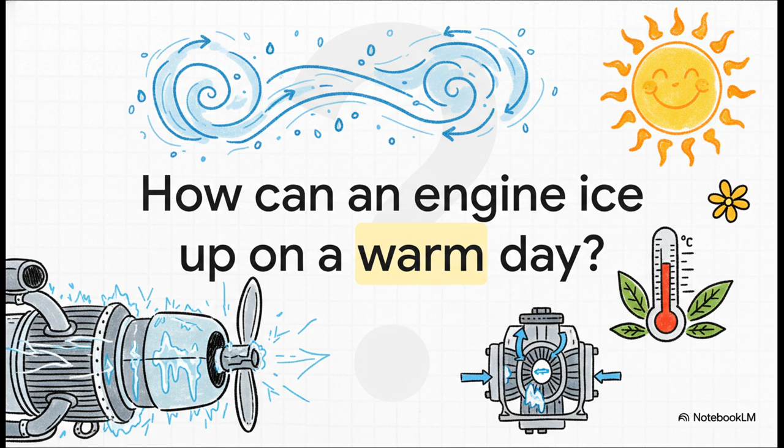But understanding the physics here is absolutely key to keeping yourself safe in the air. And that's exactly what we're going to do. Think of this as turning your textbook into the perfect set of study notes. We're going to break this whole topic down, piece by piece, so you have a clear, actionable guide to absolutely ace that exam. Okay, first things first.

Any great set of notes has to start with the main idea, right? The thesis. And of course, the key vocabulary. I mean, if you don't know the language, you can't follow the story. This right here, this is the central truth of this whole lesson. The big takeaway is that high humidity, not just cold air, is the real danger. That means pretty much any piston engine can be at risk if the conditions are right. You've got to get that concept locked in.

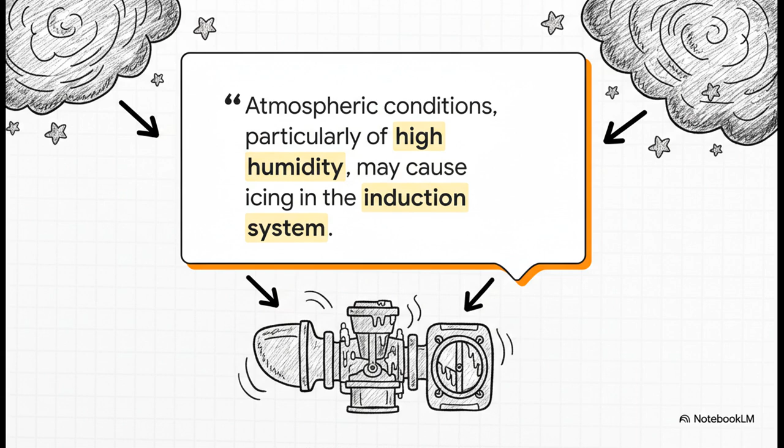So, how does this actually happen? Well, inside your engine's carburetor, there's this narrow throat. It's called a venturi. And as air gets squeezed through it, the pressure plummets. And when pressure drops, guess what? So does the temperature. It's just a basic law of physics playing out right inside your engine.

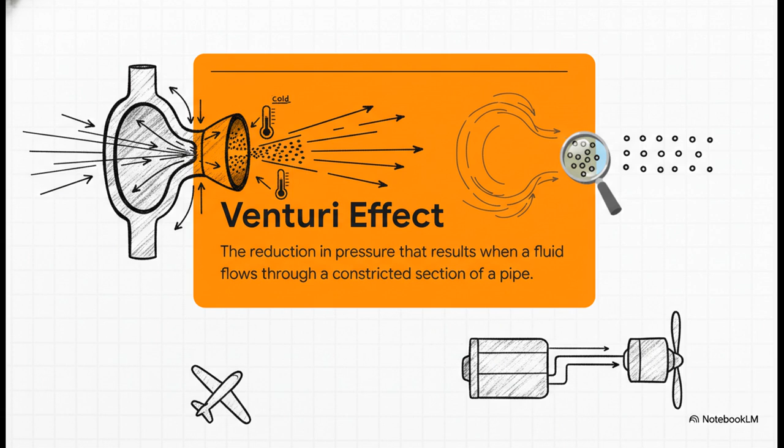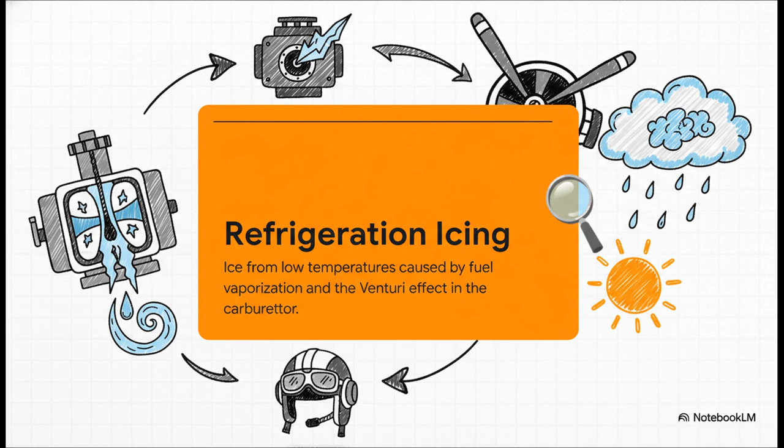And that leads us straight to the main villain of this story: refrigeration icing. This is the stuff that can get you on a warm day. You've got the venturi effect cooling the air, and then the fuel vaporizing chills it down even more. And if there's enough humidity, boom, it freezes solid right inside your carburetor.

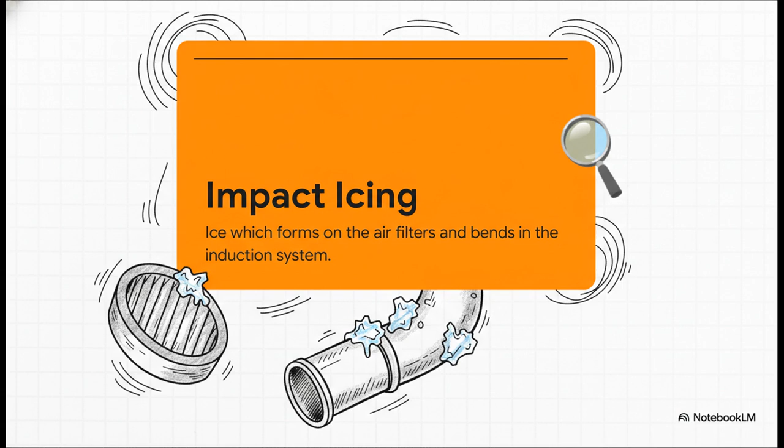Now, the second type is a little more what you'd expect. It's called impact icing. This is just supercooled water droplets smacking into a cold surface, like your air filter or the engine intake, and freezing right on contact. This is the kind of icing most people picture, you know?

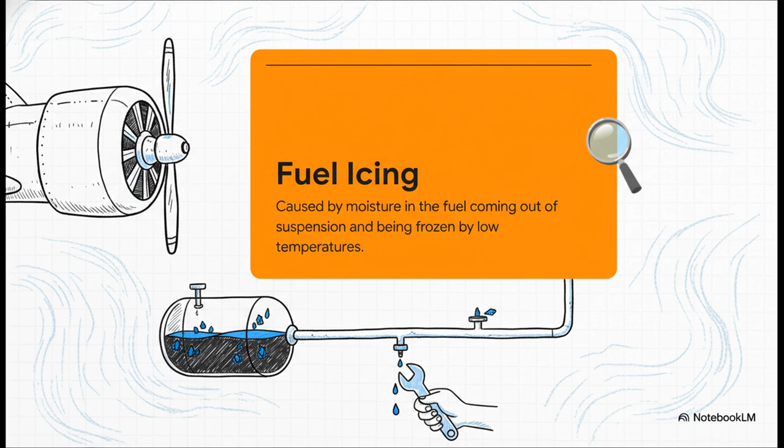And finally, we have fuel icing. Now, this one's less common, and it's all about water contamination inside the fuel. When that fuel gets cold, any water in there can freeze up and start clogging the fuel lines. It's yet another reason why that pre-flight check is so important.

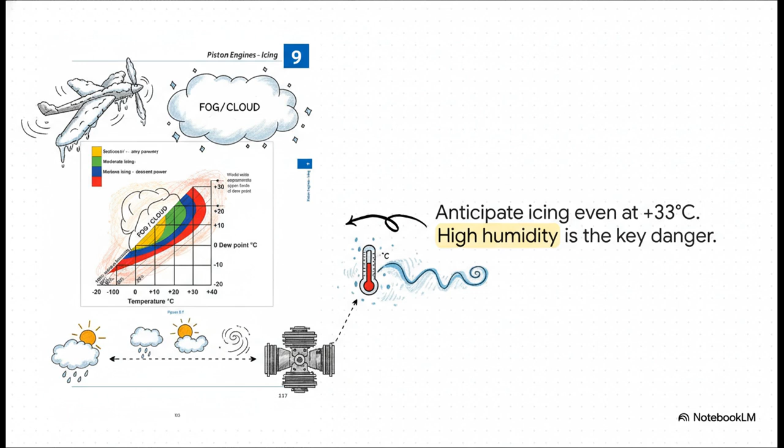Take a look. You've got temperature along the bottom and dew point up the side. The whole game is about the spread between those two numbers. The closer they get, the higher the humidity and the bigger the risk. And just look at that red, serious icing zone. It goes all the way up to plus 33 degrees Celsius. That's a warm day.

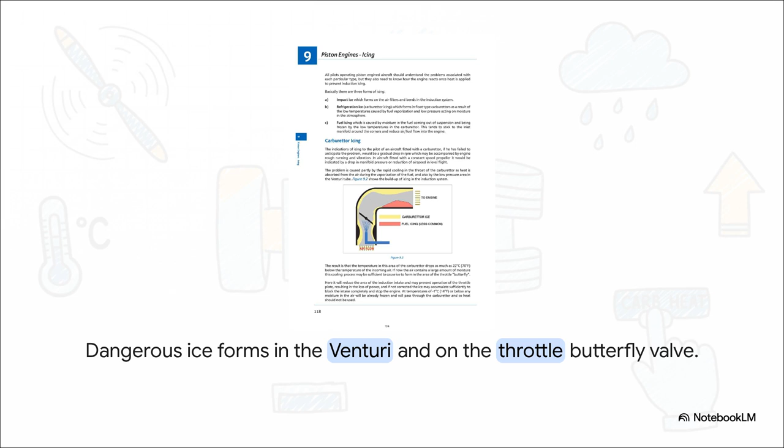And this diagram shows us exactly where the trouble starts. See? The air flows in, gets squeezed and cooled in that venturi, and that's where the icing kicks off. But look where it really builds up, right on the throttle butterfly valve. This is literally how the engine gets slowly and silently choked of air.

So what do you do if you suspect this is happening? The procedure's simple, but I'm telling you, it can be really unnerving. First, carb heat to fully hot. Second, you wait. And this is the hardest part, because as that ice melts, your engine's going to start swallowing water.

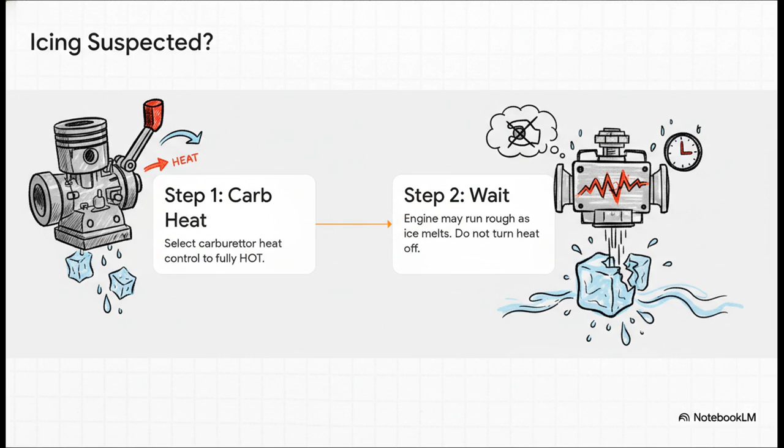It'll run rougher, you might even lose more power for a moment. But you cannot be tempted to turn that heat off. You wait. You wait until that engine is running smoothly again.

All right, so we've got the theory and the emergency checklist down. Now let's get to the good stuff. Those aha moments, the pro tips that really make this stuff stick in your brain, especially when you're under pressure. I want you to burn this slide into your memory, especially if you're flying with a fixed pitch prop.

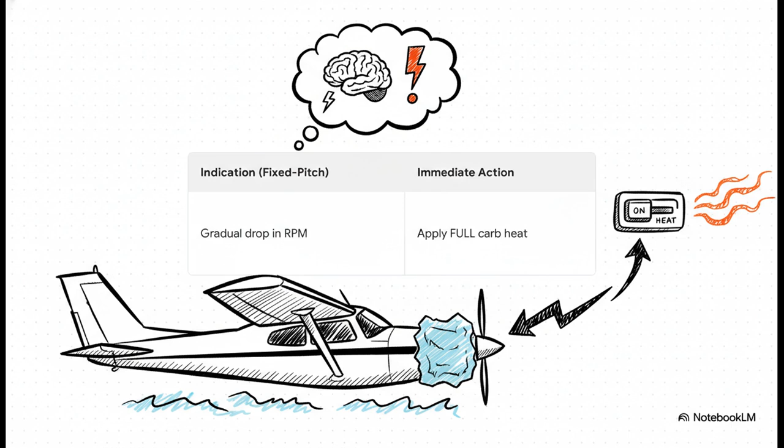If you see a slow, gradual, unexplained drop in RPM, your brain needs to immediately scream carb ice, and your only immediate action is to pull on full carb heat. That's it. Memorize that cause and effect. It could save your life.

15%. What's that all about? Well, that's roughly how much power you can expect to lose when you apply carb heat. And why is that? It's because you're feeding the engine hot air, which is less dense. It's a totally normal trade-off. Knowing to expect that power drop will stop you from panicking and second-guessing yourself.

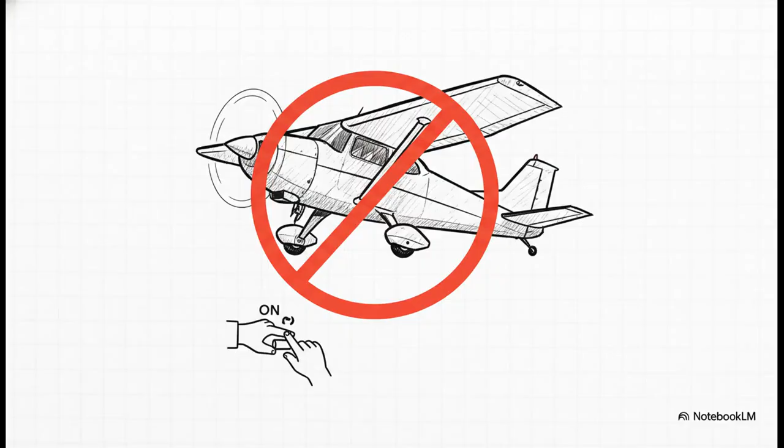And here we have an absolute 100% non-negotiable rule. Under no circumstances do you use carb heat during takeoff, period. Takeoff is when you need every single ounce of power you can get. Using carb heat robs you of about 15% of that power right when you need it most. Plus, it's using unfiltered air. It's just a massive safety hazard.

Don't do it. You know, to really make this stuff stick, sometimes you just gotta draw it out. So let's sketch the two most important visuals here. If you've got a pen and paper handy, grab them. A quick little sketch can lock this in your memory way better than just reading it over and over.

Okay, first step, that icing chart. Don't worry, you don't have to be an artist. Just draw a big L for your axes, label the bottom one temperature, and the side one dew point. Now, the important part, sketch in that big arching curve for the serious icing zone. The key takeaway here is that the highest risk isn't actually at freezing. It's in those warmer temps when the humidity is sky high.

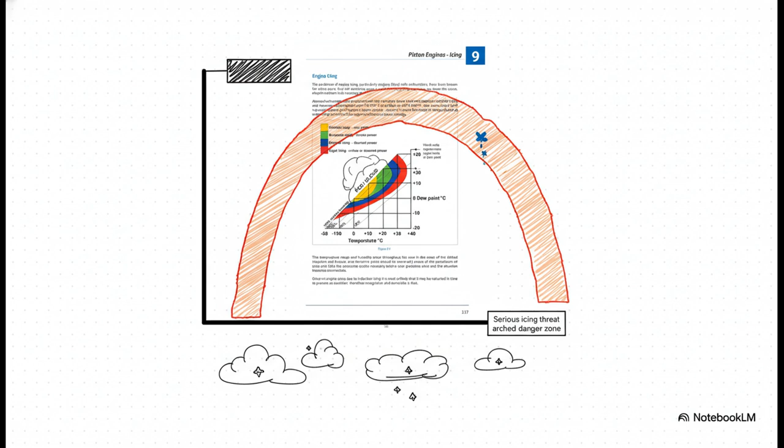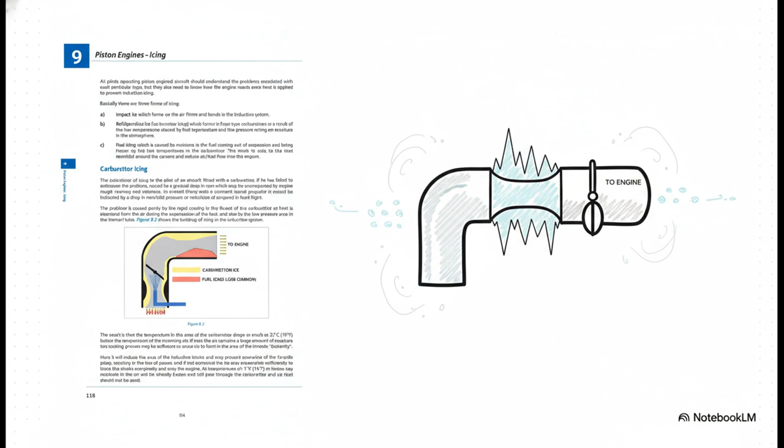All right, next up, the carburetor itself. Just draw a simple bent tube. Now, pinch the middle of it. That's your venturi. Just label it. Then, right after that tight spot, draw a little flap. That's your throttle valve. And that's it. That's your mental model. That's where the ice forms and chokes off your air.

Okay, we've covered the theory, the procedures, and you've even got your own sketches. Now it's time to check if it all sunk in. Let's do a quick retention check with a couple of questions you are very, very likely to see on an exam. Question number 1. You're flying along, everything seems fine, but you notice something's just a little off with the engine. What is that first primary sign that you might be dealing with carb icing?

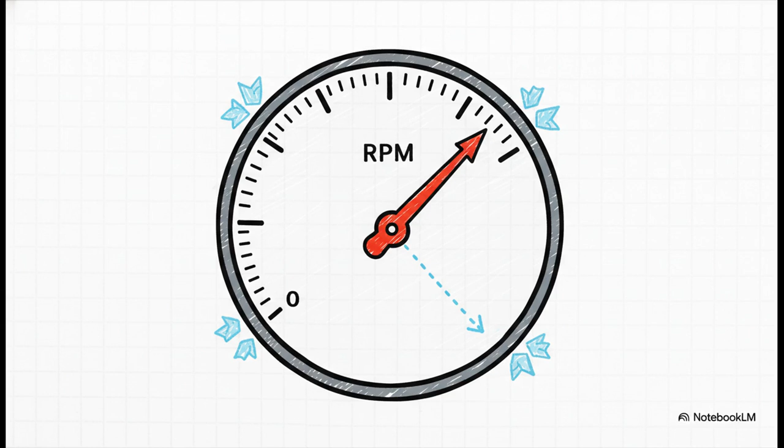And the answer is that gradual, creeping, unexplained drop in your engine RPM. It's not a sudden lurch. It's sneaky. The ice is just slowly building up, strangling the airflow, causing those RPMs to slowly fall.

All right, last question. This one is a big-time safety rule. There is one specific phase of flight where using carb heat is an absolute no-go. What is it? Yep, you got it. During takeoff. You just cannot afford to rob the engine of precious power when you need it the absolute most.

Look, mastering this stuff isn't just about passing a test, right? It's about being a smarter, safer pilot. Which really makes you wonder, what other simple topics have these kinds of dangers hiding just below the surface?